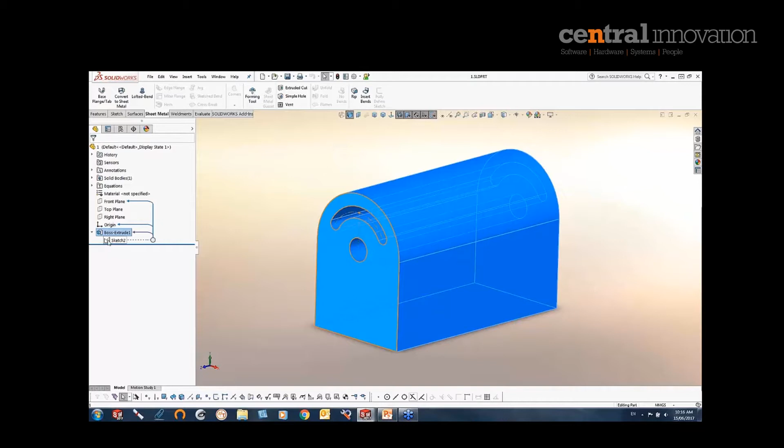So converting to sheet metal from solid bodies is fairly easy. So we will have a look at some examples here in regards to convert to sheet metal. We can obviously, by thinking a little bit lateral, create a lot of geometry with a simple sort of boss extrude here. So instead of doing a base flange and edge flanges and then editing the sketches, we can go in and actually use a solid and then convert that to sheet metal.

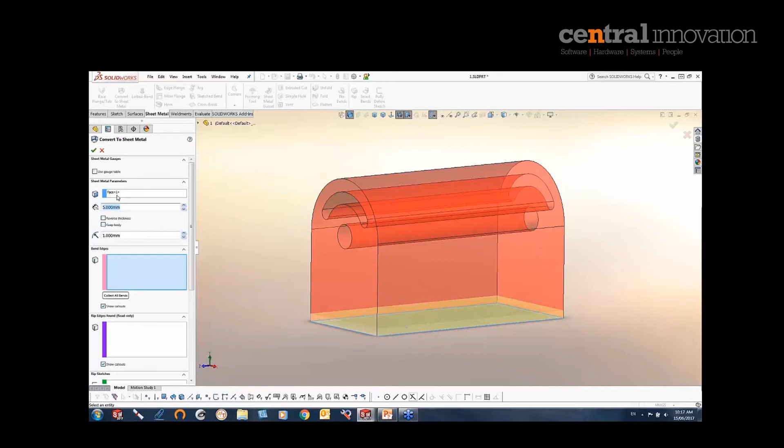So we will just go forward here. So convert to sheet metal obviously allows us to pick a thickness here, for example. I'll just give that 3 mil. And we can pick edges on the solid model to define our bends. And then we can choose whether we want to reverse the thickness on the inside or the outside here, all depending.

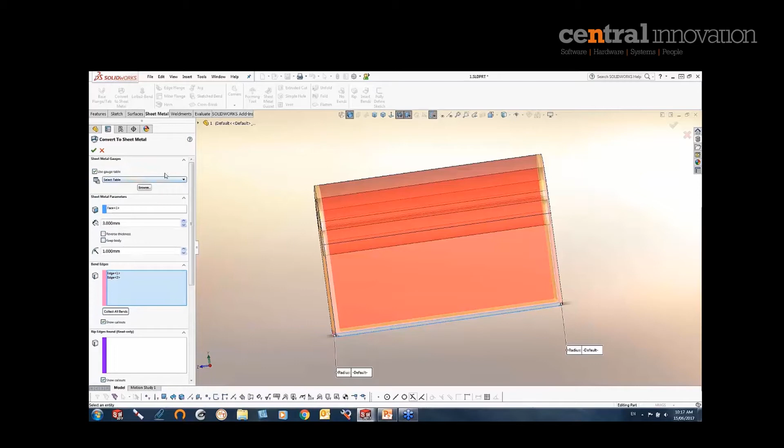There's a lot of other settings in here we can have a look at a little bit later on a different model. It's possible to just set the thickness, or you can use your gauge tables if you desire so. And then it's just a matter of clicking some buttons, tick OK, and we've got a sheet metal part, like so. Since it's now a sheet metal part, we can obviously then add edge flanges, so we can continue modeling on this with conventional sheet metal modeling methods, and obviously that flattens as well.

Another example, so again I had an example here. You might have seen it already, but you didn't have any sound, so again my apologies for that.

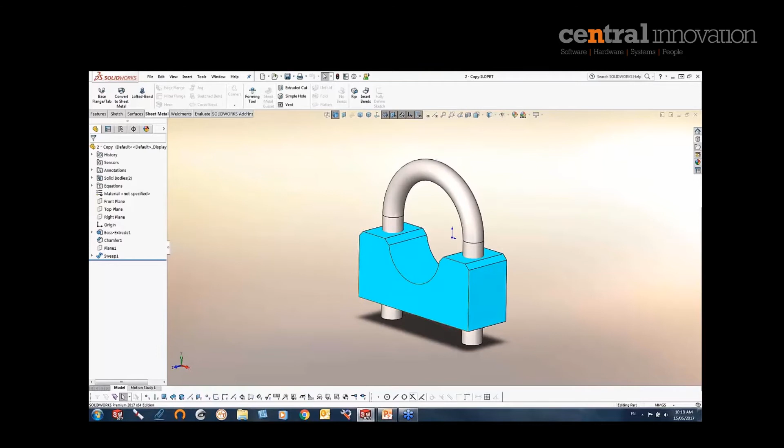This is just a standard multi-body part, two solids in it. So again, from a concepting perspective, it's pretty practical to be able to do this. So we can quickly go in and convert that as well. So this is basically a pipe clamp. So let's just make that a little bit fatter there. And off we go. We've got a bracket for that.

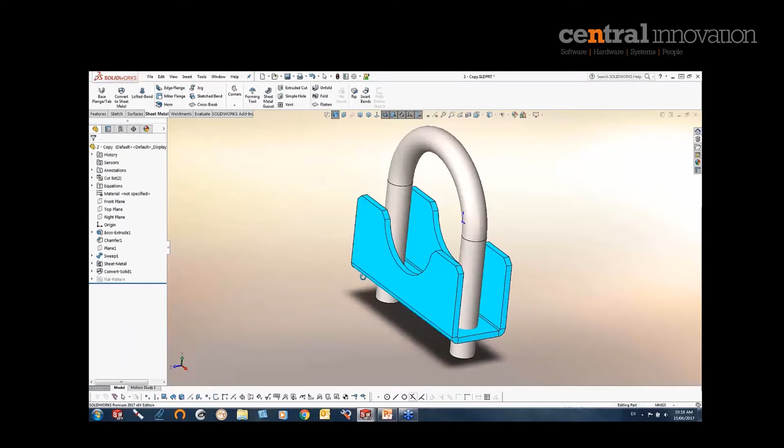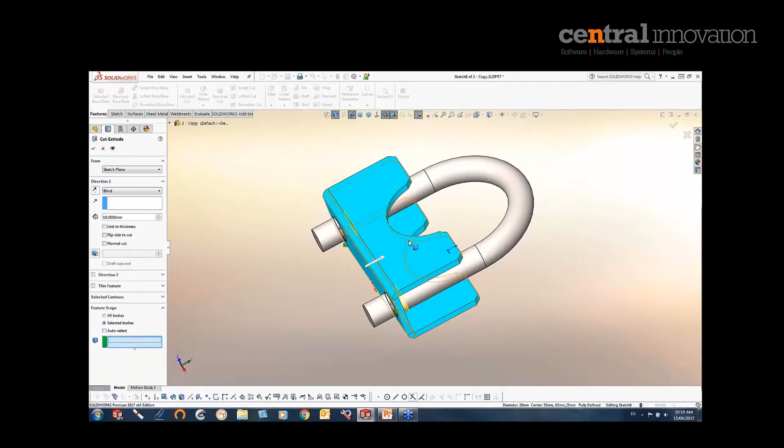And consequently, we can just continue here and make a bit of a modification to this, just putting some holes in here like so. This time it went a little bit better. Extruded cut, and here you sometimes have to sort of select under the feature scope what you actually want to affect. In this case I only want to affect my sheet metal part, and off you go. We've now got a pipe clamp, and naturally that flattens out beautifully.

Other things you can convert, this is a sheet metal part. Oh, rubbish. It's a surface part, obviously. So the surfaces can be converted to sheet metal as well, and that actually gives you a little bit more flexibility in regards to modeling in multi-body. So here it's again just a matter of going into convert to sheet metal. Pick the bend, and off we go. Very simple. So that surface could have been extracted from a master model, for example, which you might want to convert.

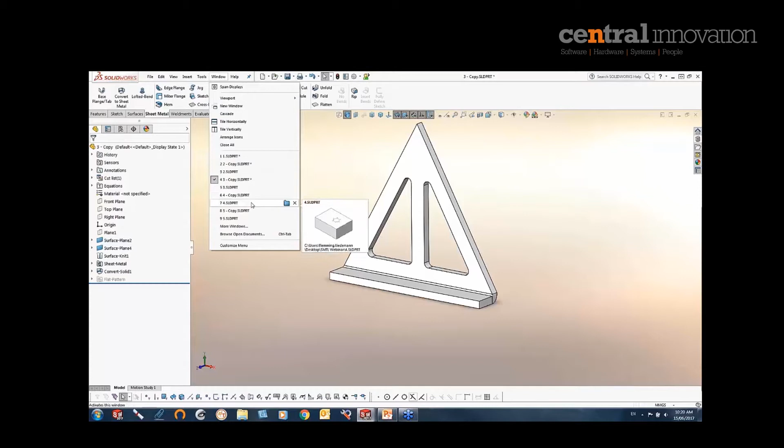Another example, we've got this little tank here. So obviously we're talking multi-body. Up till now we've just done single bodies. So we can use a body to make multi-body sheet metal parts. So again, I'm going from a normal extrude. I've split the face on the top here for a lid or a solenoid or whatever. And here we can then go in and obviously set that as well.

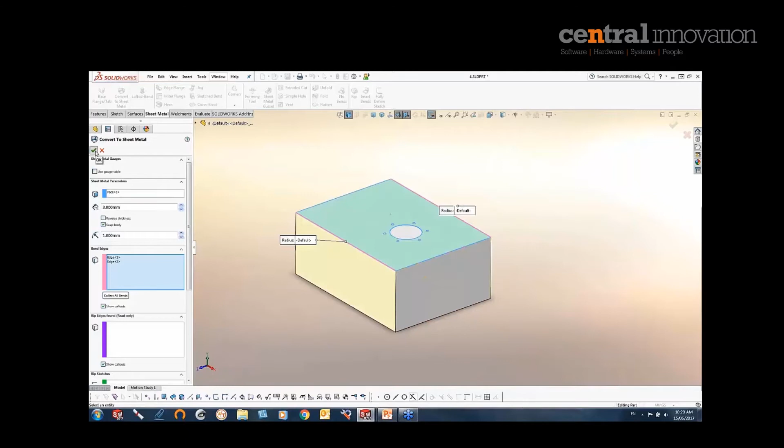The trick here is to keep the body. So I want to make multiple sheet metal parts with this, so I want to keep the body for the next part of this. I'm just going to whack that in here, and you'll see when I go OK, the solid body will actually stay in there, and we can move on and do another convert to sheet metal and pick the edges for that.

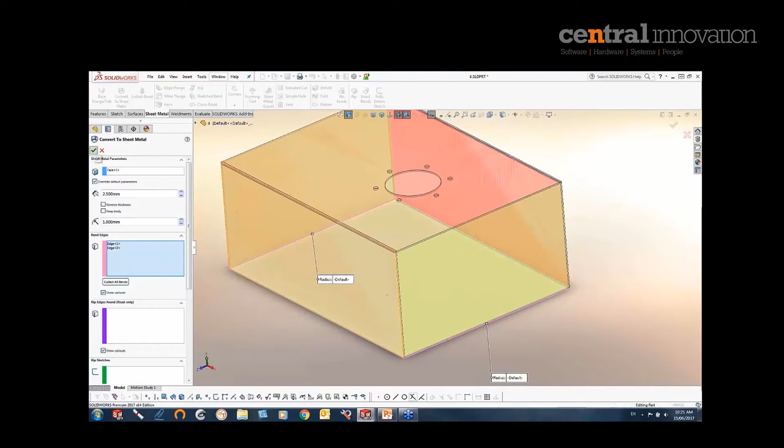You can control them individually as well, so if you need multiple thicknesses, we can go in and basically override the default parameters here and say that the bottom sheet here is a 2.5 mil sheet. And for the last sheet metal body you put in there, it's practical to obviously untick the keep body tick box here, so it gets consumed, and off we go. We now got 2 sheet metal bodies in there. We can flatten and obviously start to detail out, like so.

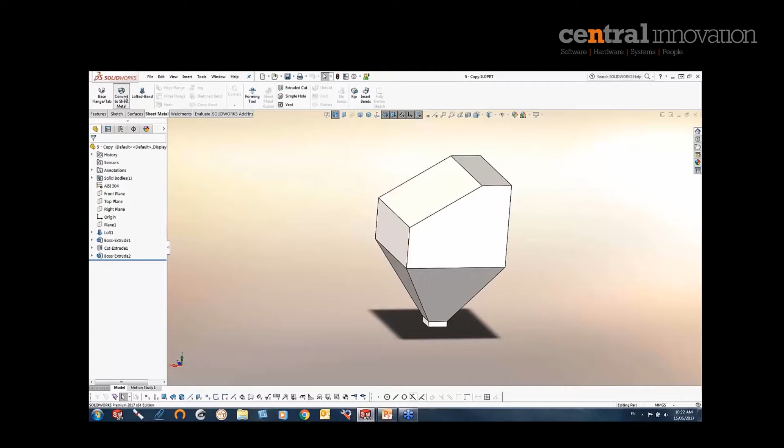Okay, let's move on to the next. So there's not really any limits in regards to number of bodies when using convert to sheet metal. We can sort of go in and pick and choose. Sequence is important when you work with bends and converting to sheet metal, so it sort of has to be connected when you pick the edges. And you can see sometimes you don't get a preview until you get the last bend put in here.

Again, we can keep the body and go on. Now this also leans toward if it's all plate work, for example, so we can do multiple. Let's say this is made out of 10 mil plate. We can just go in and basically add them in as we go and keep the body. I'm just going to reverse this.

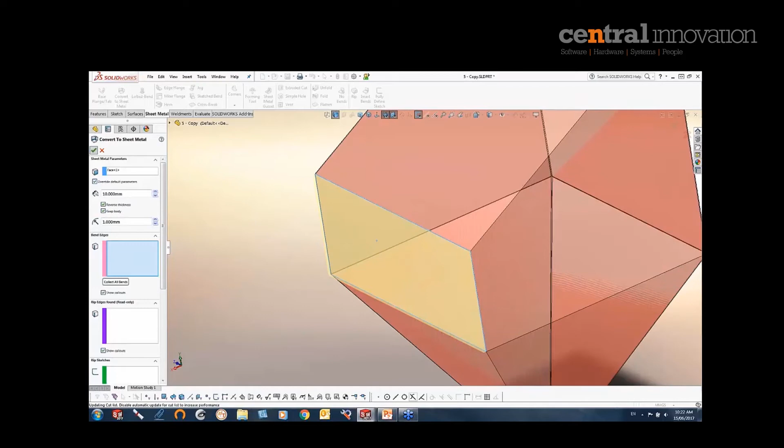Again, I need to override here, and then we can go in and actually have individual sheet metal or plate work, if you like, just straight off the bat.

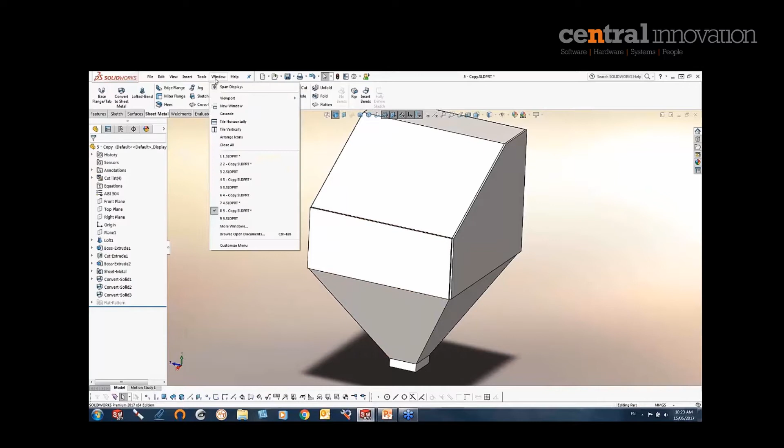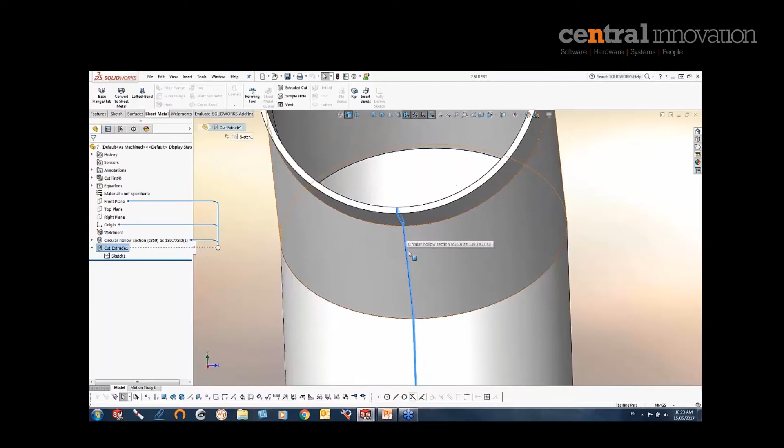We'll have a look at another example here. Another interesting one here is this lobster tail, or kind of a lobster tail, so it's a bit of pipe work. This was actually made with a weldment as well. So a simple sketch where I've got the path for the weldment profile, and that same sketch I used to cut these individual bodies, so we've got a bit of a gap.

Now you will see with convert to sheet metal that this does not really work. It wants a planar face or flat face. I've seen a few examples where attempts are fruitless, obviously, because you can only do straight or flat items here. So the tip here is to use insert bends instead, and you can then pick an edge of the body, and we can tick OK to that, and we'll just toggle the flat display here. We'll then have the flat pattern here.

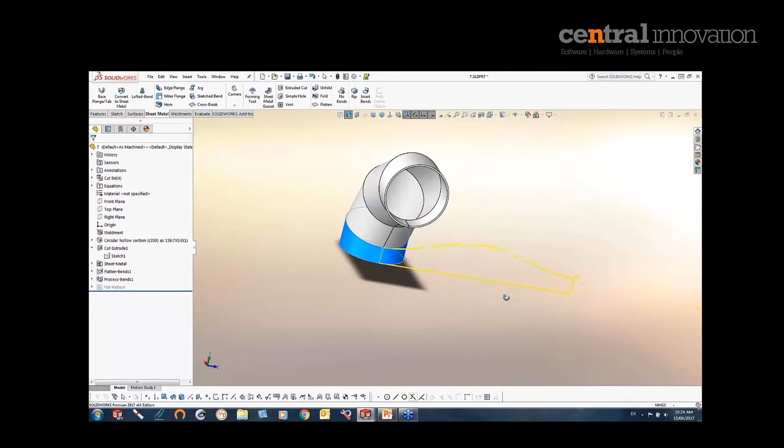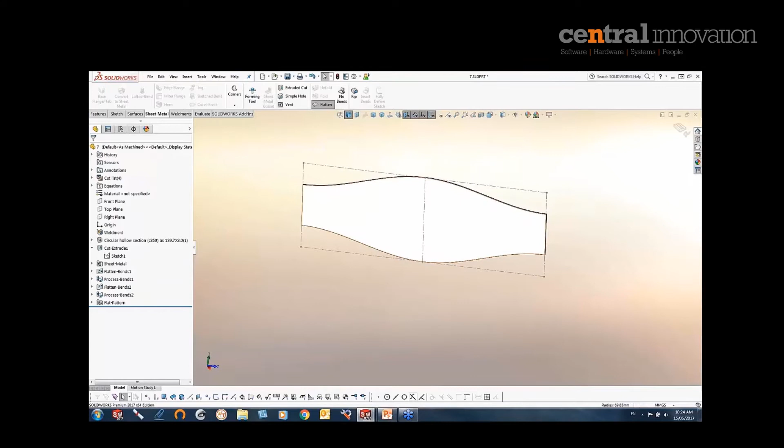Naturally that works for all of them, so you can have them all in one part, and then you can detail them out later on when we get to that. So again, we can flatten that and have a part ready to rock and roll, literally. Okay, so it's no limitation really to what type of body it is. We can convert most things from solids into sheet metal, so it's only your imagination that sets the limits.

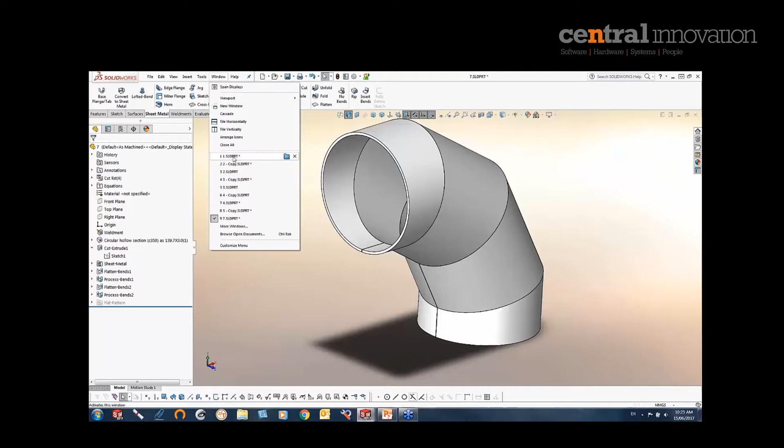I'm just going to have a look at another example. So this is just a typical example of what you can do. This is just an enclosure. It started out with a boss extrude, and then we did a convert and another convert, and then we basically did all the standard operations you can use with sheet metal features, putting on edge flanges, cut extrudes. The beauty about this is that everything stays in check. You don't have to worry about assembly mates and hole alignments and whatnot.

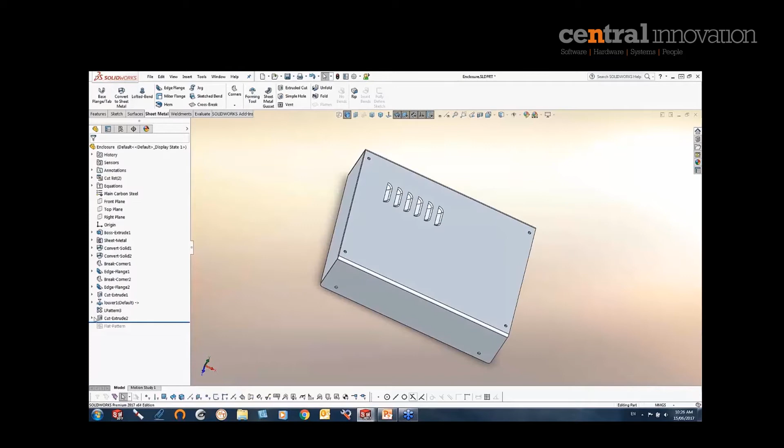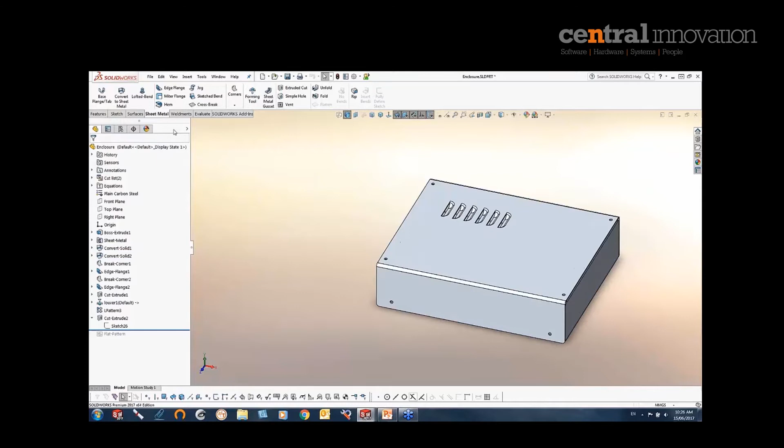If you move a hole, that's going to ripple through to both components, and you will see that if we isolate this we've got all the holes intact, everything lines up, and naturally this flattens as well. We'll just toggle a flat display here to have a look, like so. Okay.

A good one here is the alternative to a weldment profile. You might have seen it, but you probably didn't hear the sound, so I'll repeat this as well. This particular part is just a weldment profile. You see it's the tapered flange channel, and there's some cuts in there with the holes. So if you want an alternative to this, you might want to have a bent up profile,

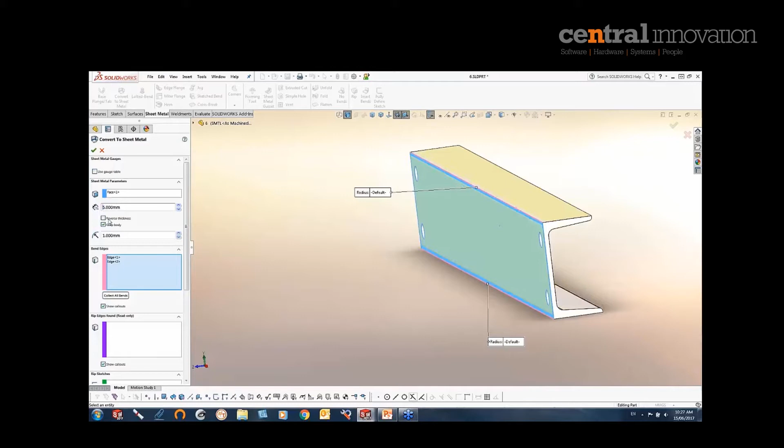and again we can use convert to sheet metal, and the beauty about this is that we can keep all the holes intact. I'm just going to reverse that thickness, maybe reduce it a bit to 5 mil, 1 mil radius. Whoops, I forgot something here, and that's that little keep body functionality there. I don't really want to keep that in my convert. And we have got a plate that can be bent up, a good alternative maybe to our drawn profile. Very good.

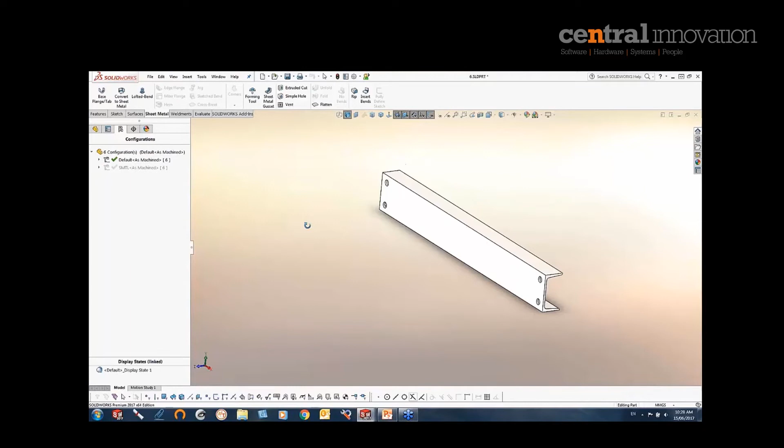Okay, we will have a look at a more complex case. I'm just going to open up another file here. This is basically the one I want to work with today. This is in fact a part we used back in 2011 in the What's New. I'm just going to start from scratch here and delete all these things out. Like so. So a simple extrusion with a couple of cuts. There's some bosses in here, some clearance holes, so the whole thing is set up, and we want to change this so it's a sheet metal part and then make some drawings of it.

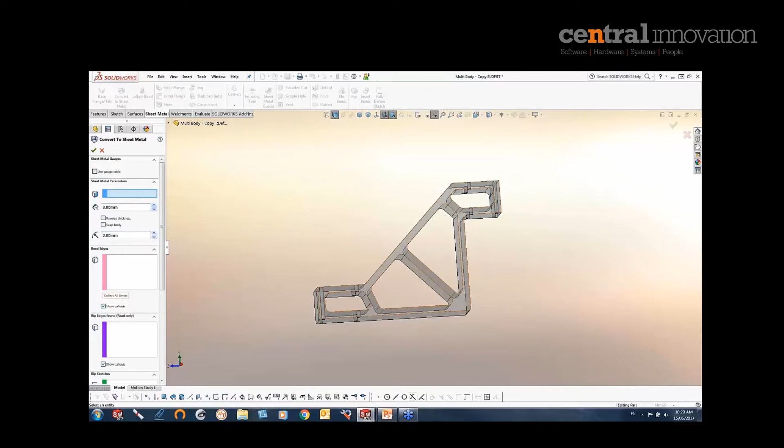So again, it's a matter of using convert to sheet metal. I'm just going to use a 3 mil with a 2 mil radius. Now you can see in this particular component that there's pre-made bends, if you can call it that, here, and they could have different radiuses, and the system is smart enough to pick up on that. So I'll just do the base plate first here, and I'm just going to tell it to collect all the bends.

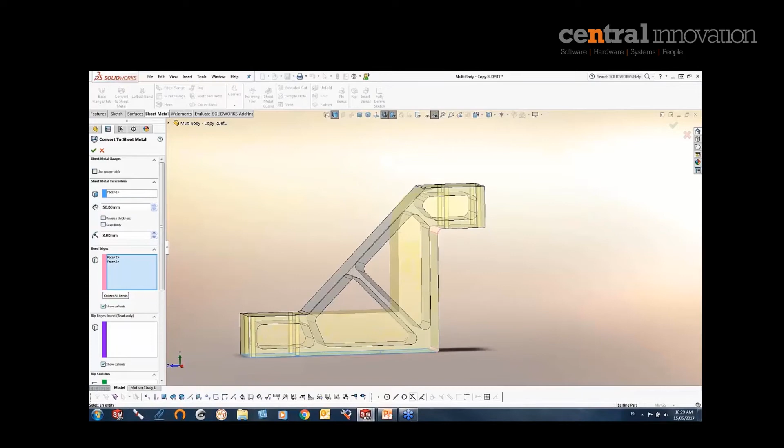Obviously this is a little bit thick, so we might want to change that again, so I'll make that 3 mil. So it basically overrides the radius here by collecting the bends, and consequently you will get what the geometry tells the sheet metal to do. I'm just going to reverse the thickness here.

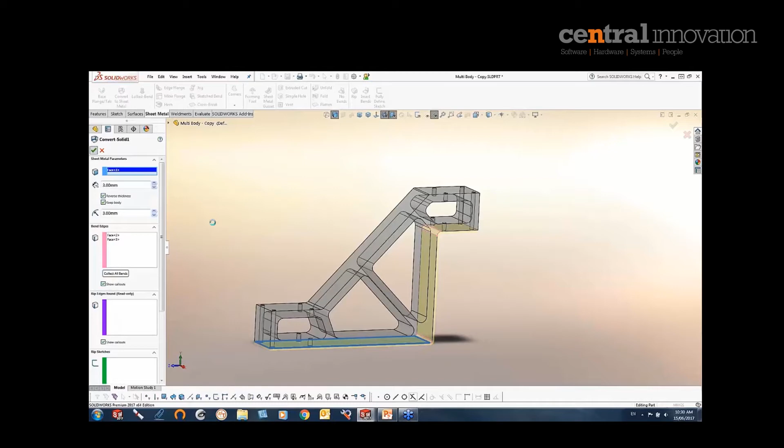And again, I forgot to tick my little box, so we can always edit the feature and keep the body here. That works well. Now one conundrum is obviously if you've got, for example, these sides here, and I actually want these to be in halfway, so they have to sit 1.5 mil offset because I use 3 mil sheets.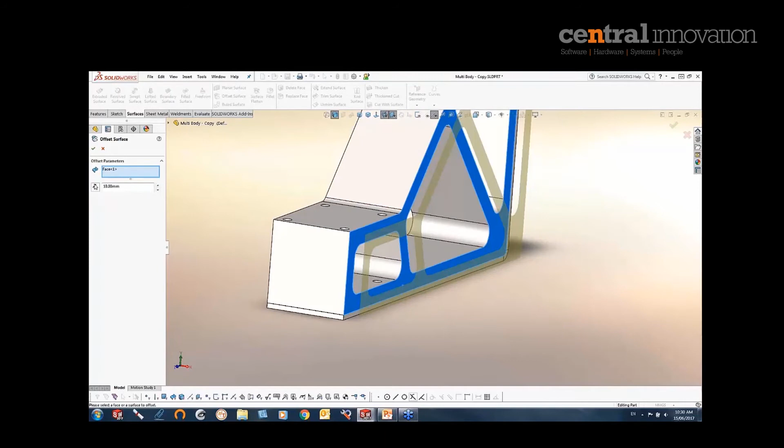Currently it's not really out of the box possible, but what one can do is offset the surfaces and then use the surfaces to convert to sheet metal. So you can rely on multiple bodies, surface bodies or solid bodies in the part, so you can convert them together as such. So here I'm just going to offset this surface here. I'm going to reverse that so it sits inside with an offset of 1.5 millimeters.

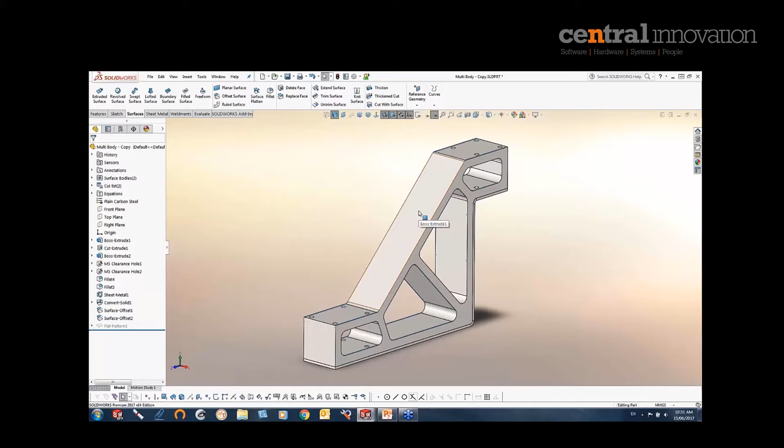And the same on the other side here. So again, an offset surface, 1.5 millimeters offset, and they now sit in there. I'm just going to hide that for now, so you can see there's two surfaces sitting in there now. And we will work with that. So again, we can do a

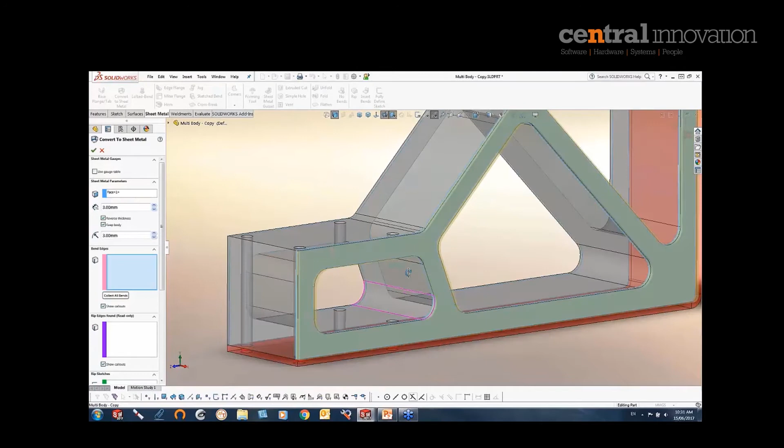convert to sheet metal here, and the trick here is naturally to go in and pick this surface now, and that makes it then possible to go halfway, so you can manipulate the model and get the placement of the sheets in the correct spots in that way. We'll just repeat that for the other side here as well. I'm just going to select the surface in there and get them in where they belong, and we will tick OK to that.

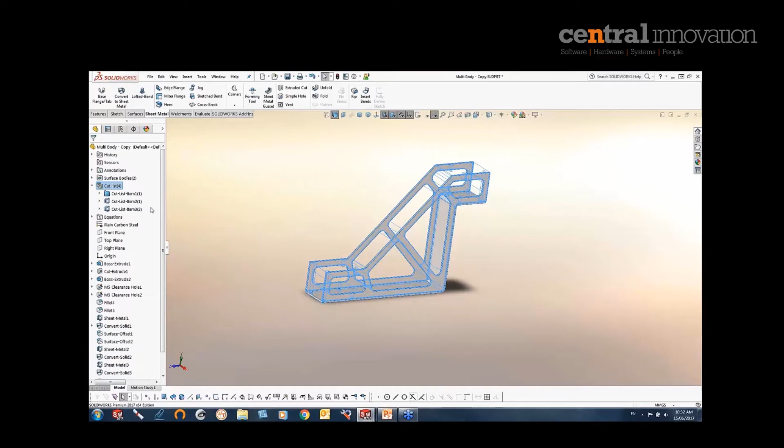So I obviously now got 3 sheet metal bodies in there. I'm just gonna make sure that my cut list is updated here, and you can see we get them in there. Now if you've got 2 opposites like that and you want to combine them, it's relatively easy. You can actually do that with an edge flange. You might know this, but if you don't, there's actually an option for that.

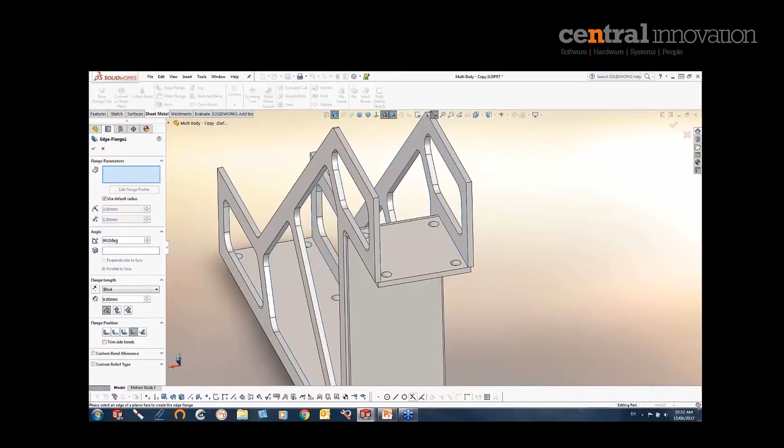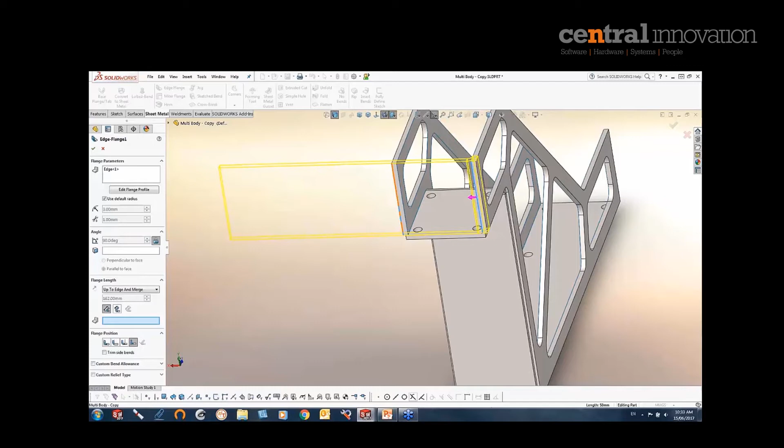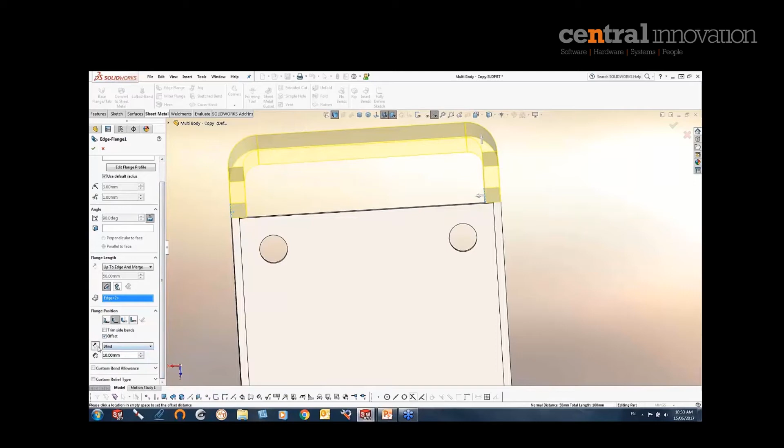So I can use my edge flange here and basically go from 1, and then for the flange length, in this section here, I can go in and up to edge and merge, and I can then pick the opposite edge here. Oh, hang on, what happened here? There you go. And again we can manipulate the offset here as well. So obviously we can do all the standard stuff. So if we want that halfway in here, there's an option to offset it. 1.5 millimeter, maybe that should do the trick.

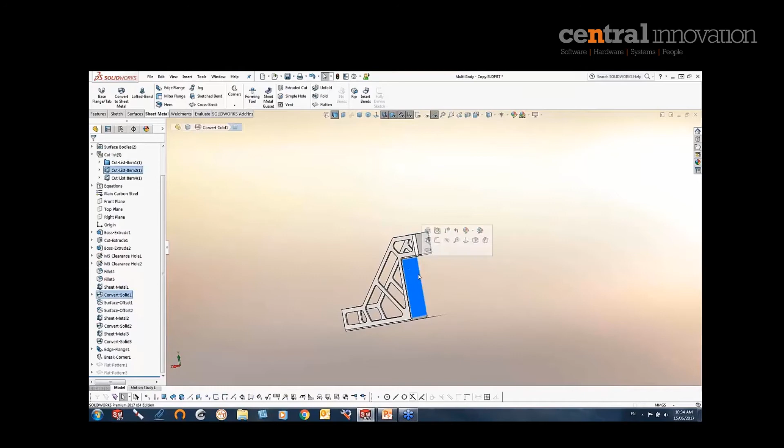And here we have it. So that sits in there nice and easy. And we might want to break corners so it looks tidy here as well. So we'll just do a 4.5 millimeters corner, and off we go. And you'll see in the cut list that obviously this now got merged. We will just check if it flattens. It should. That all flattens. It's a good practice to just quickly check whether we've got problems or not. And we can continue with that.

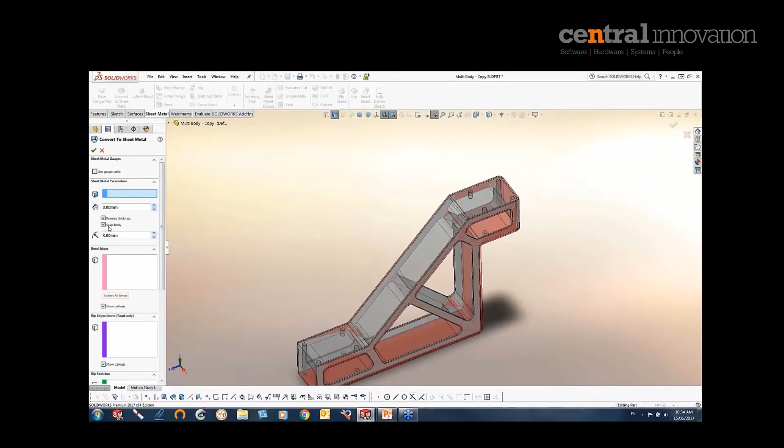So I'm just going to show my body here again. Like so. I'm just going to put a lid on this. And again, I'm going to use convert to sheet metal. This time I'm going to untick the keep body because it's the last body I'm going to convert. Again, I'm going to collect all the bends. You can see they highlight in the user interface here. And all we have to do is tick OK. Whoops, I think it's probably the thickness here again.

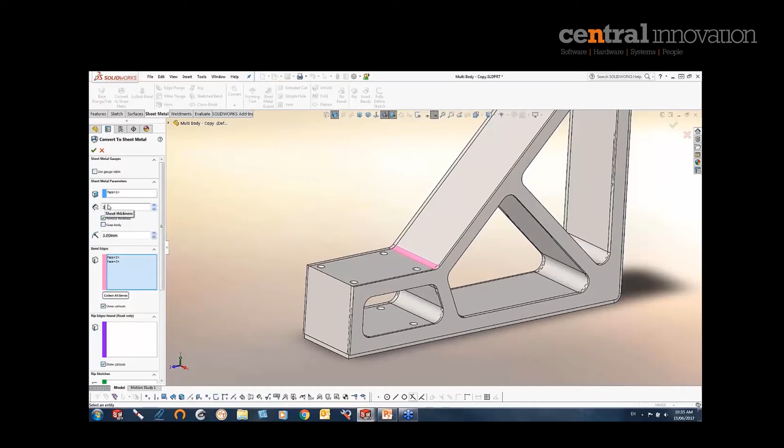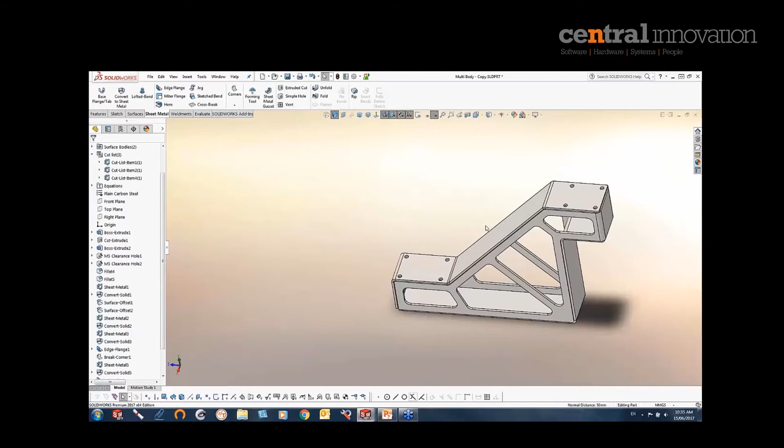I mentioned this before I think, but we can obviously run different material thicknesses as well. So we'll just pop that in here, and I'm finished with it, so I don't want to keep the body. And we might want to polish that off with an edge flange here at the back. And in this case, I'm just going to use up to vertex. And it's all good. Again, test for functionality. And that all seems sweet.

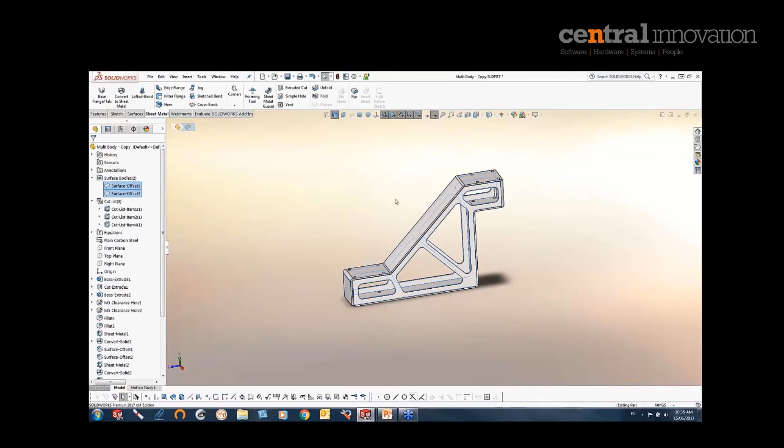So we're just going to hide these 2 surface bodies, and we are ready to rock and roll in essence. So we will have a bit of a look at a couple of options here. One of them is if you've got a multi-body sheet metal part, you can straight off the bat export all the flat patterns out in one hit.

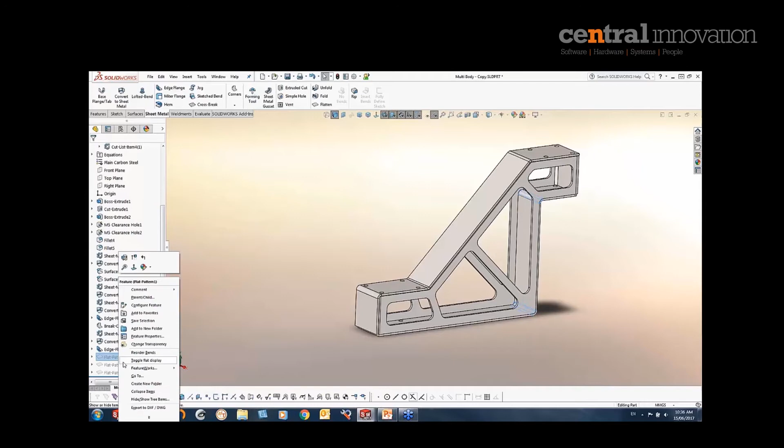So when we export DXF, DWG, we obviously got some options in here. One is to export to separate files, so we can do that. And when we save here, I can go in and actually stick these flat patterns in as we go. We'll just take two of them in this case. Let's take all three of them. And I can obviously choose whether I just want the geometry and bend lines and all that sort of stuff. I can put them in a single file or a separate file here.

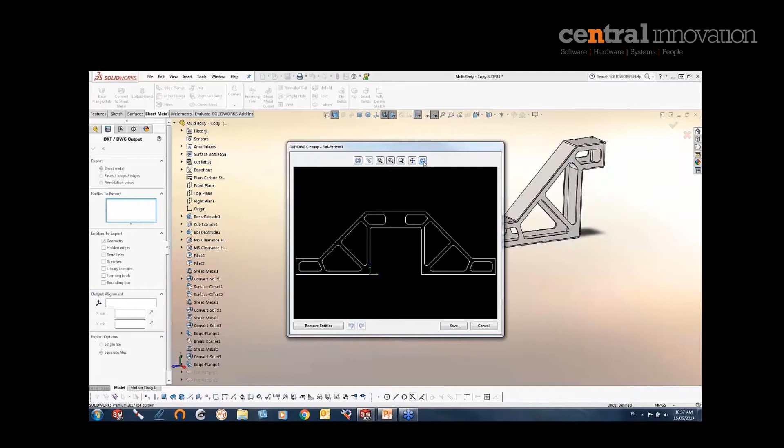And when we go through the export dialog, you will see that we now got all the sheet metal parts ready to save out as DXFs. And off we go.

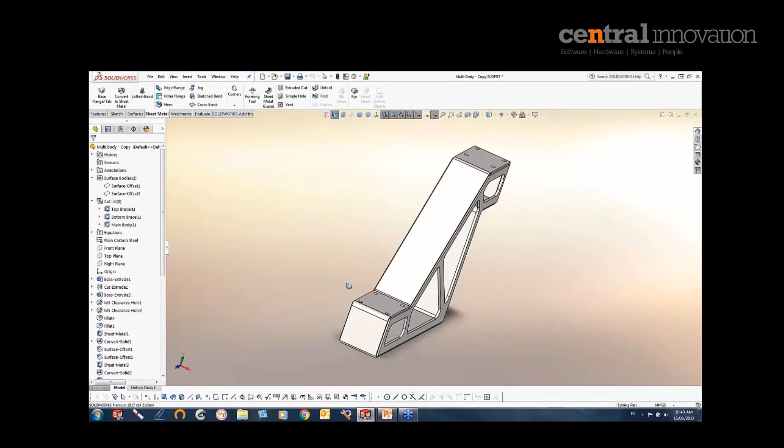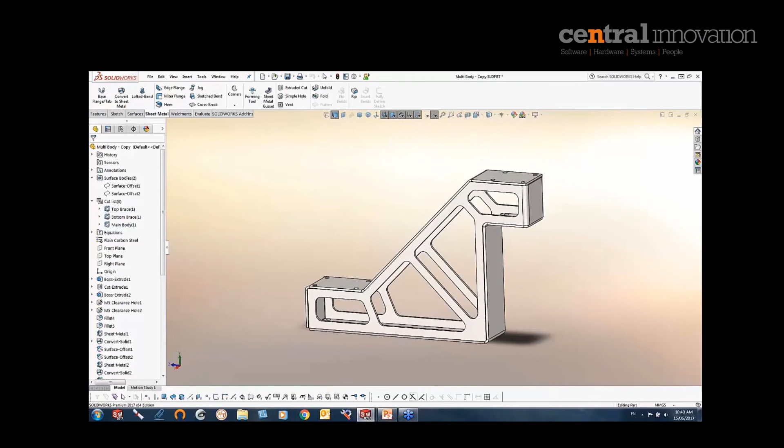So for the properties themselves, it piggybacks off the properties list file, and you can always put other things in here as well. So we can add other custom properties on the fly, and then we can tap into it via this dialog as well. So in essence, you should look at this as an assembly as such. So consequently, the custom properties on the top level would be as you normally do with an assembly. It just makes it easier to manage.

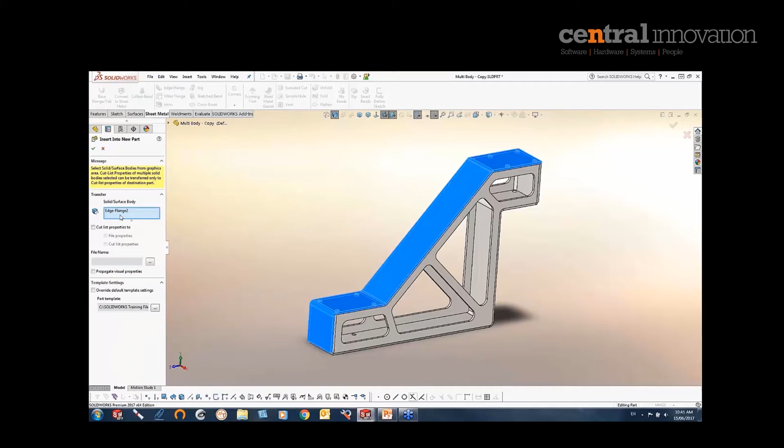There are some options in regards to saving bodies out, and also if you want to tap into some of the other properties in a standalone part, we can insert this into a new part. And we can transfer the cut list properties to either the cut list properties in the split part, or to the file properties, which is your custom properties. And then it's just a matter of going OK to that.

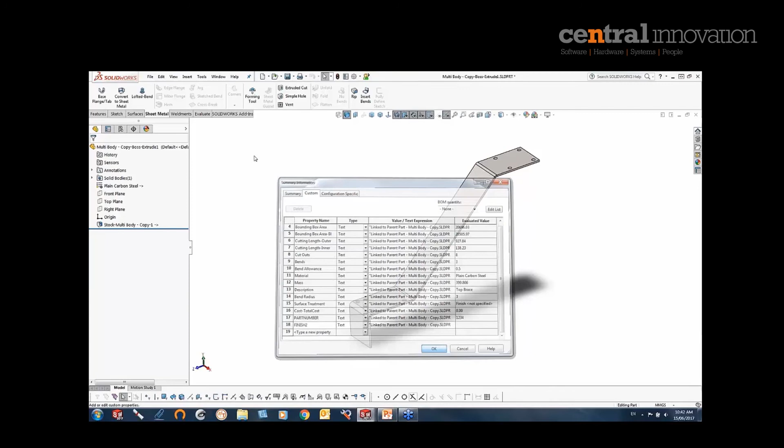And when we have a look at that, you will see that now it's a solid body with a reference back. So obviously the part we just came from is now a master model as such. So here you will see that all the properties from the cut list have been deployed into the body itself instead, so it's linked to the parent. So the only place you can change this is basically in the parent part. Just close that again.

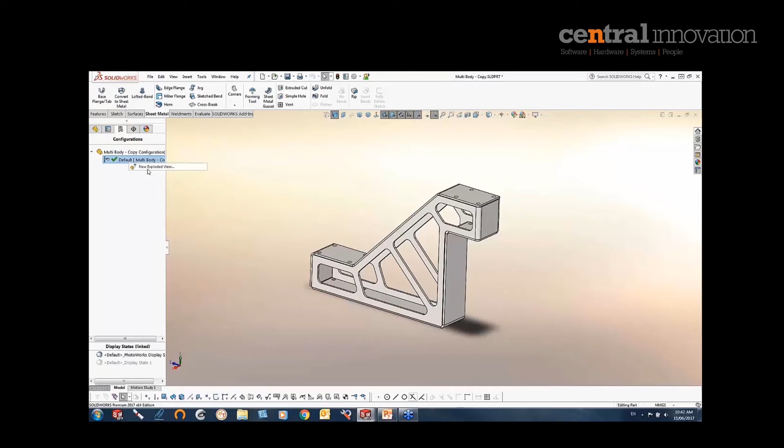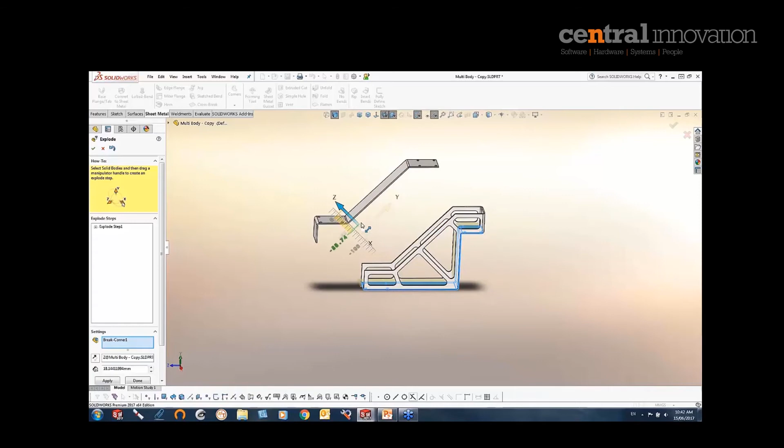Okay, another option you've got for multibody parts, not just multibody sheet metal but any multibody part, is that we can explode it now. It's not obvious, so where you find it is actually under the configuration, where we can put in new exploded view. And then we can go in and manipulate that a little bit. We're just gonna align up to this, drag it up, maybe this one as well. We're just going to align it to this face so we can drag them out uniformly.

So now we've obviously got an exploded view in there. We can explode and collapse. Limitation is you cannot animate it just like in an assembly. It is a static explode as such. Like so. And we will go in and have a look at drawings. So we're just going to have a crack at that. So we will make a new drawing from this.

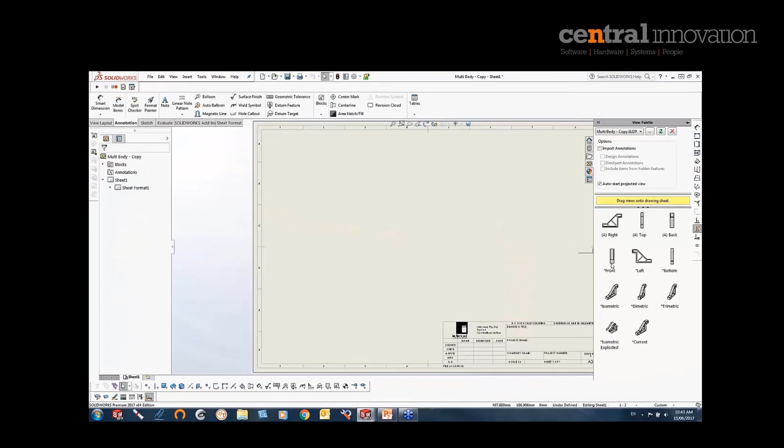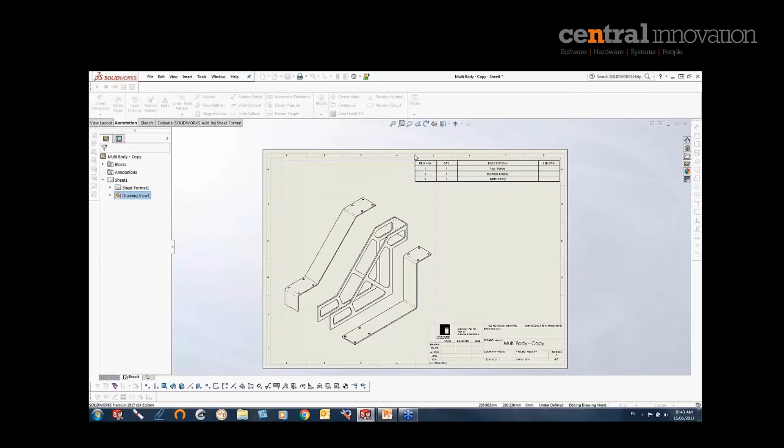And in this case, I'm just going to whack in an isometric exploded view. And we will insert a cut list. So this is obviously now our bill of material as such. So a Weldment cut list, we'll stick that onto that. And out of the box, it doesn't really give us much in regards to sheet metal, because obviously it's meant to do Weldments. It's a standard cut list as such.

So you can change these obviously by picking the cut list properties here. You can use cut list names if you want to tap into the cut list name instead. Again, we've got duplicates obviously because I called them the same. Cut list item property, so I can go in and change that. Say I do not really want the length here. Sorry, I'm on the wrong box. So I don't want the length, I actually want my thickness.

So sheet metal thickness here, we can just delete that out and just call it thickness. We can add in other items here by inserting columns. And for this one here, I might put in my part number. And all we basically have to do now is balloon it. I'll just auto balloon this view here. And off we go. So that's sort of half of the thing.

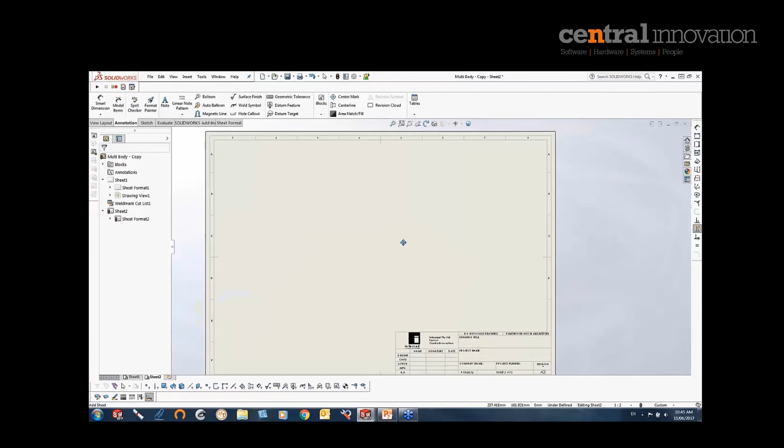So individual sheet metal bodies, obviously you would like maybe the flat pattern out on an individual sheet, and it's technically just a matter of adding another sheet. I'm just going to go back to the part first. There is a little bug here, so if you want to do single body views, make sure that you actually take it out of the exploded view here, and when we then return to the drawing, we can then get started.

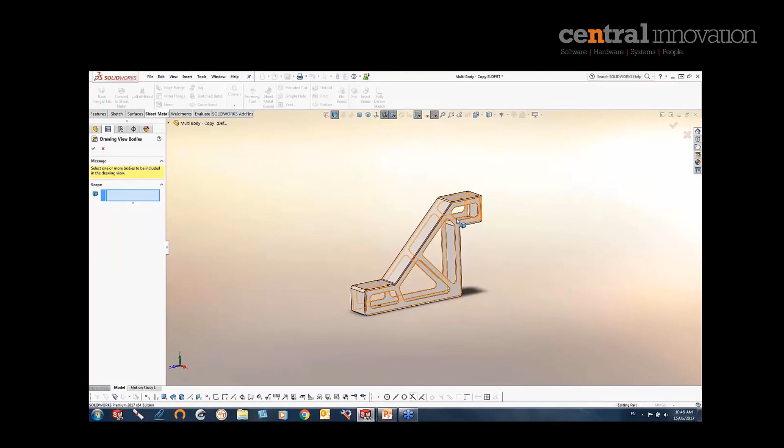So in the view layout we can use a model view, and obviously we pick our part we want to model. And we now got an option here, select bodies, and I'll just select the main body here. And down the bottom here you actually get an option for flat pattern for the more views, and there you have it. You've got the flat pattern on the sheet.

I've been looking for a way to get cut list properties deployed into the sheet format as such, but currently it's not possible. Not that I know of anyway. If any of you guys know of a way, please let me know. It's always good to be enlightened that way.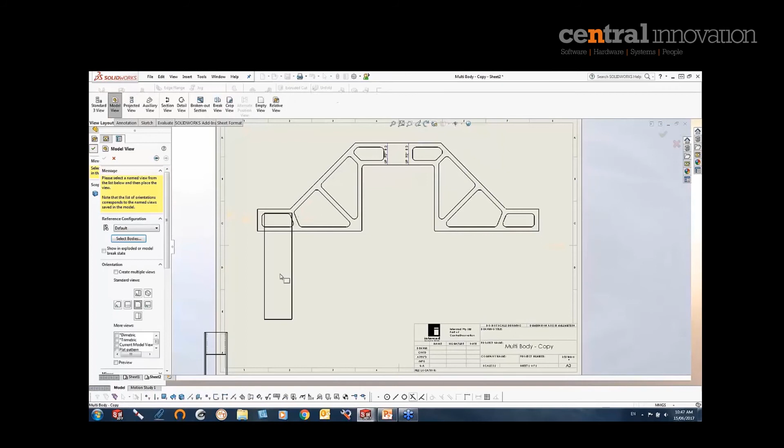So obviously that way we can do the flat patterns straight off the bat, but we can naturally do normal views as well. So we can go in and make simple projected views here, and all we have to do is line them up. Back to the custom properties.

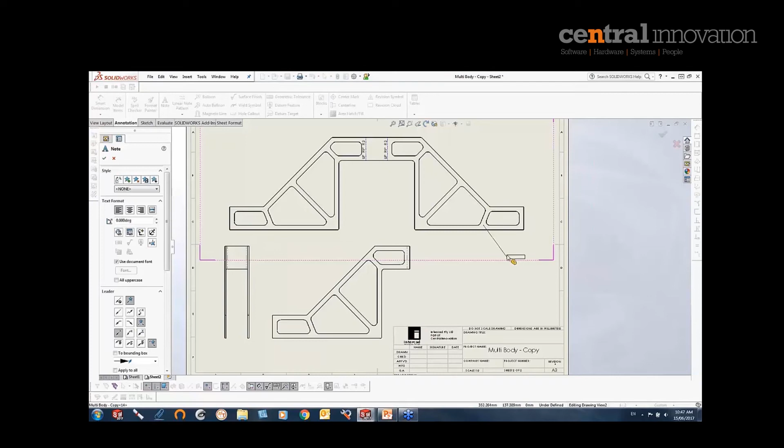So what I've found though, you can attach cut list information to a note. So it actually works this way. You can make a standard note. You have to attach it to the part itself. We can go in and change link to property here, and it would have to be the component to which the annotation is attached. And then I can pick, for example, part number, and we've got it there. So I did a little bit of a workaround here.

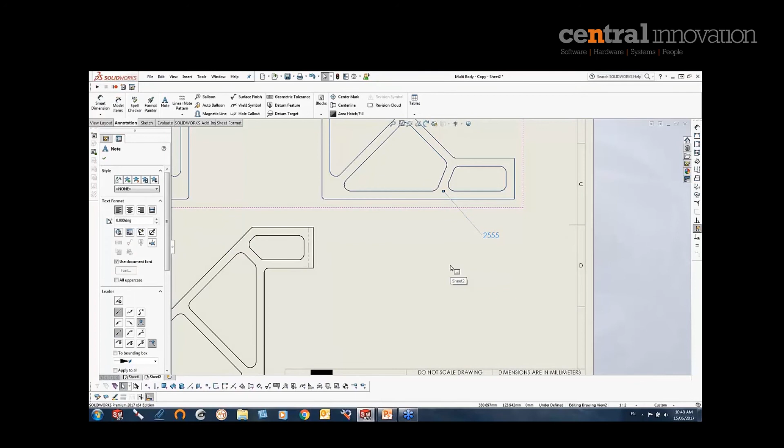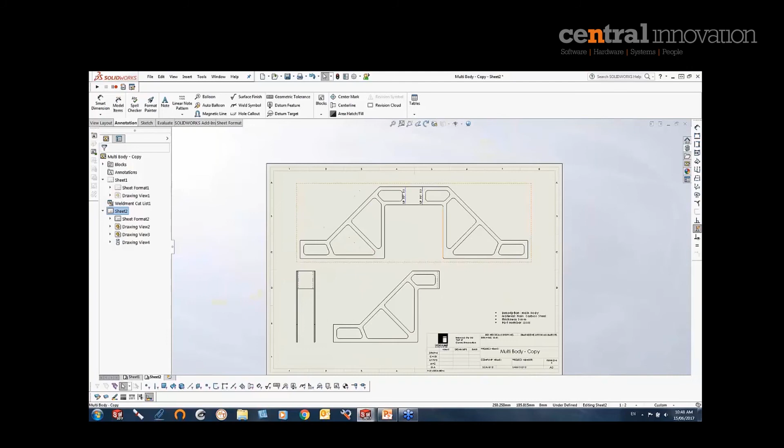So I created a note tapping into multiple items in the cut list and put it into my library. So it's basically just detaching it and saving it into your design library, and when you drag it onto the view, it will then deploy the information automatically. So depending on what information you want to derive out of the cut list properties, you can do that this way instead. So that makes it nice and easy to at least add the information to the sheet where you have perhaps a flat pattern. So that's a little bit about a few tips and tricks in regards to drawings and properties.

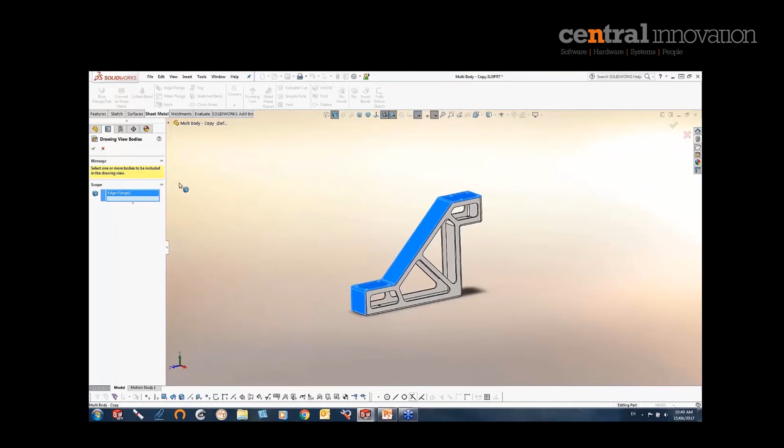We could obviously finish this little fella off now by adding more sheets, and then go in and reiterate this. So it's model view. We'll go next here. We will select the body. I might just pick this top one this time. And for insertion of the view, this is where you go down to this area in your property manager, and then choose a flat pattern.

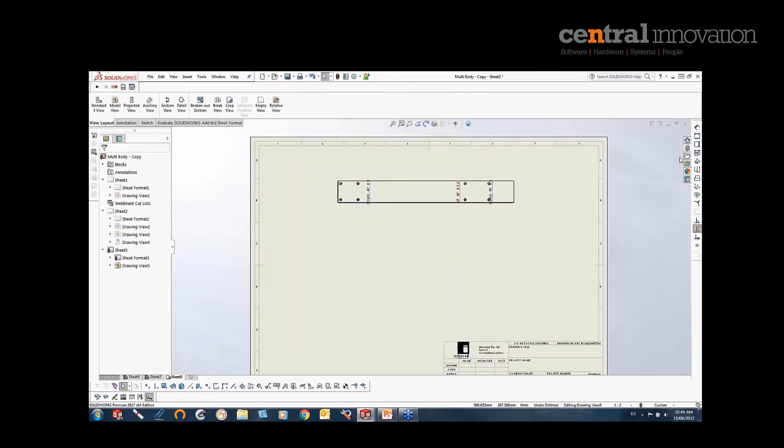And then we can add them in just like that. And again, if you set up a note linked to cut list properties, you just drag it into the view and place your note. So now we should have a couple of different sheets here ready to go. Okay, so that's basically a quick run through Multibody and especially converting to sheet metal.

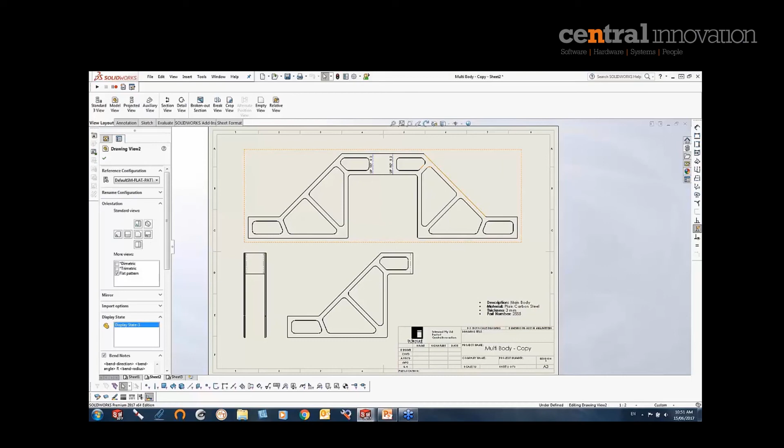So with the note, basically I obviously tapped into these different custom properties here. So the trick is to create an annotation note and actually initially attach it. So you have to put the leader on. And then I can say, okay, I want to tap into description, say. And with a space, I go over here to the left-hand side and link to property. And now I can actually tap into component to which the annotation is attached. And we can then go in and say, okay, I want my description.

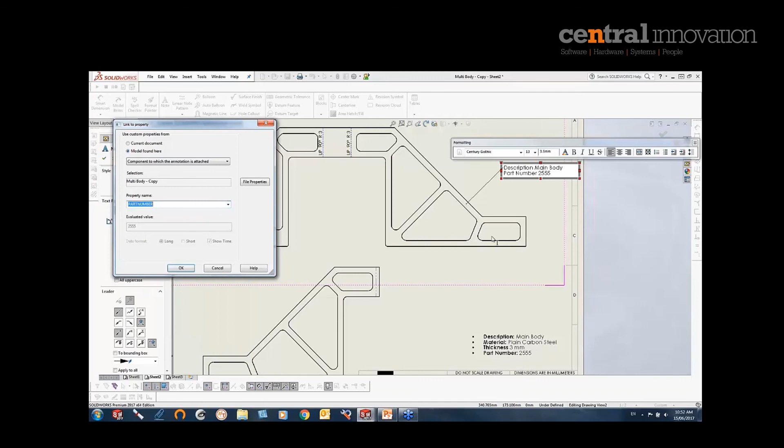And then it's basically just continuing here. So I could go in and put something else in here. Let's just tap into something else, maybe part number, like so. And again, I'm going to use my link to property, component to which the annotation is attached. We can go in and put in, let's just call that part number. We've got part number here. And that's fine and good. Obviously, that's still attached here.

So to save it so you can reuse it, basically what I did was I made it no leader first, and then you park on the note, and then you save the note into your design library. So park on it, so it's active. I'm just going to drag that out to make sure I don't pick anything else here. And add to library. Let's just call that new note. I'm just going to whack it straight into the design library on top level here. You can do that for any custom properties in essence, but you will see now when I drag that onto the view of the body that it will deploy the information. So I hope that answered your question.

I've got Chris Ryan as well. Chris, are you there? Yes, I am. Can you hear me? Yes, I can hear you. Thanks.

I typed my question in. I don't know if you could see that, but this is a problem I've had for a long time. It seems like such a limitation that you can't have your cut list properties display in your title block like you would in the other part. There are so many advantages doing multi-body sheet metal parts, but you can't do the right drawings. And if you do the assembly, you can do the drawings, but you have all these other associated problems. Is this going to be fixed soon, do you think? Because it seems to have been a problem for a long time.